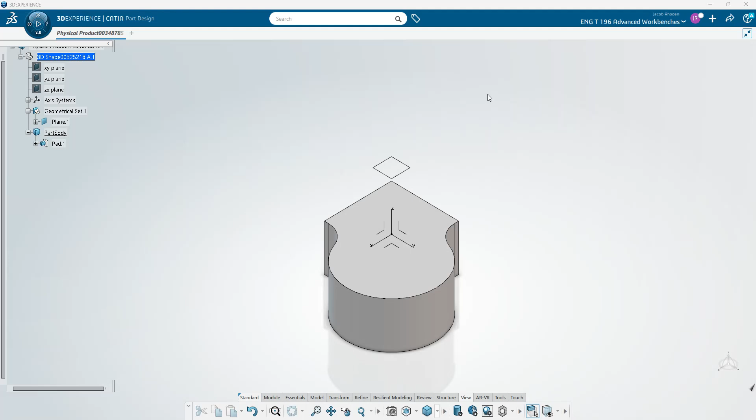Here I'm going to be going back over the steps real quick with a different shaped part, to show how the profile works, trying to cut this out and going over some different tool stuff.

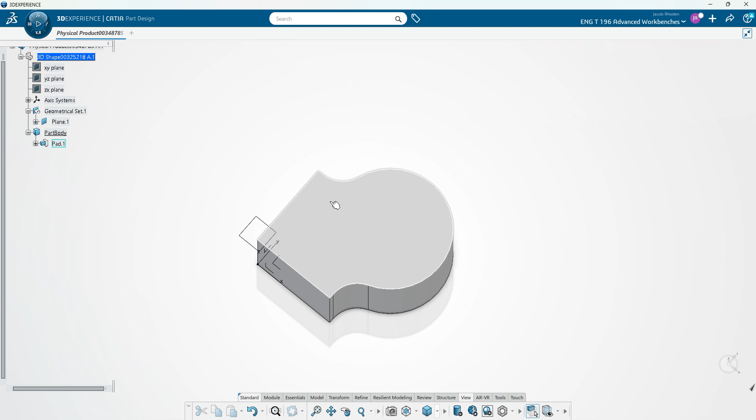So you can see I've made a strange looking part. I took a cube, implanted a circle into it, and then chamfered those corners in right here.

I'll show a quick example. Let me just make a new sketch, say I make a sketch right here. One thing you do have to keep in mind - if I just made the same rectangle and circle that I made...

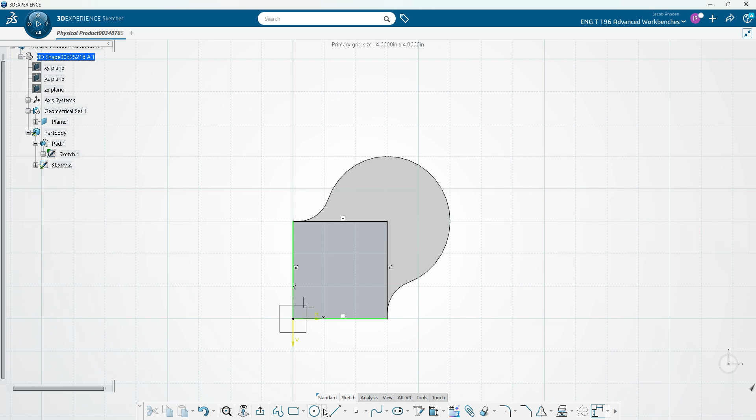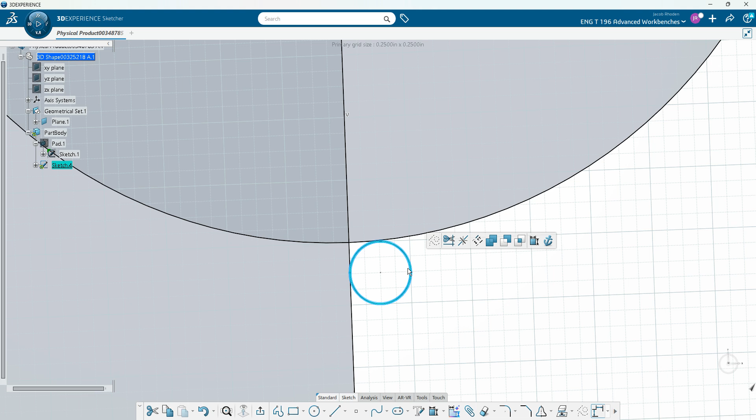Right here, you can see we would not be able to mill this without a lot of effort, because milling a hard corner like this when you're trying to use something circular, like an end mill - say we have our little end mill coming in, here we go, right here - the end mill is really going to struggle to cut that corner.

Which is why in our final part we chamfer that corner. So that's always something you want to think about, making some of these sharp little corners. To get that realistically, we'd probably have to pick the part up and rotate it over, and that's going to add more steps, more machining time, and eventually be more expensive.

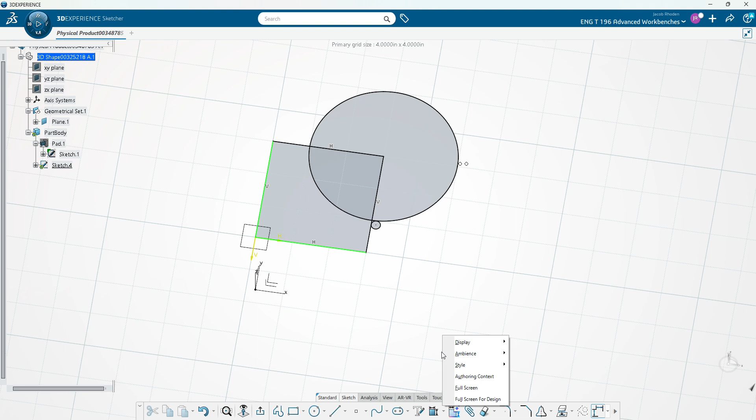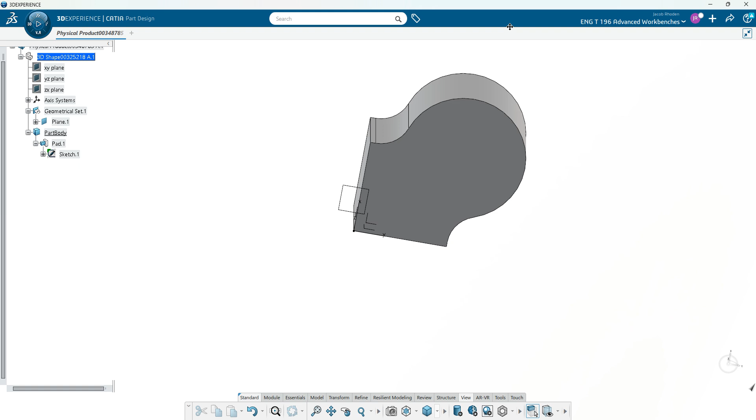So you always want to make sure that you're not making unnecessary features that are going to end up costing you more money. So if we exit out of this sketch, we can get out of our way and re-show that pad. You can see those corners - instead of having right angles that we'd have to take the part and probably pick it up in a fixture and move it, maybe put it in a fixture like this, and then we got this right corner right here.

Then we have to mill that little pocket out. Instead of doing that, we can just chamfer it and keep it so we can do all this profiling in one pass.

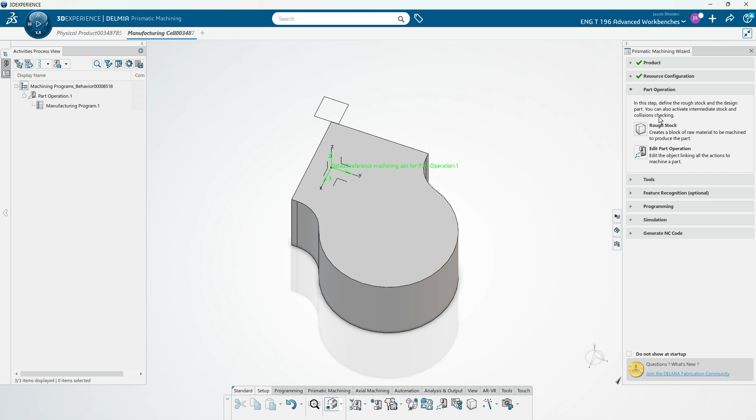So what we're going to do, same as last time: over here prismatic machining, already got our safety plane up, generic machine, okay, rough stock. Now here's us making the rough stock, so we want to make sure that we can see our part body.

So right in here you select 3D shape, select that part body. Yes, we do want to create a new one. Select that part body again. Then once again, we can see the stock.

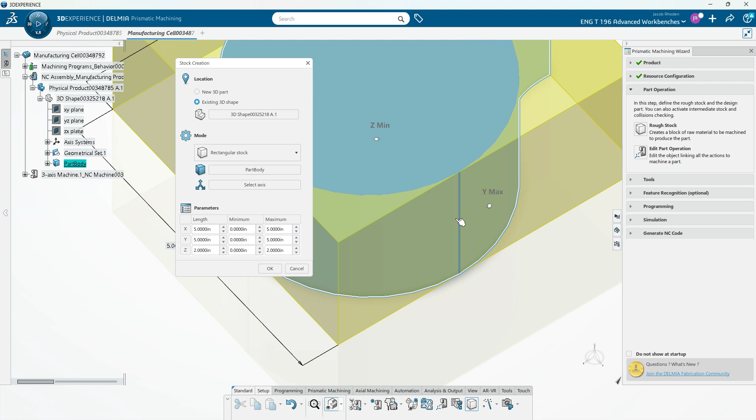So it obviously makes the stock as small as it can, but we don't want to have this little line right here, at least not right now - in case this could be like a casting or something, we want to make sure this line is getting cleaned up, because you don't want to have this nice big circle and then have one little strip that's for whatever reason not finished off nicely.

So what we can just do is take X, add an inch to it, take Y, add an inch to it, and boom - now everything is within that stock.

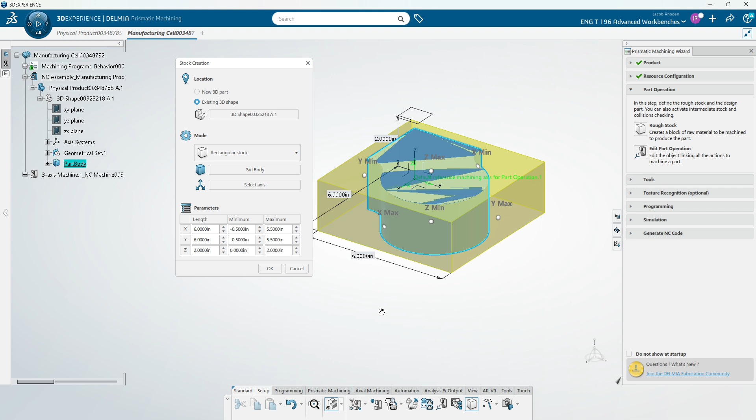And then obviously, like I said last time, if you're doing a facing pass on this, you can take this Z, move that Z up, and then you'd be able to put this in a vise, face it on the other side, and then you'd have a nice squared up part. But we'll just keep this to 2 since we're not facing it, and then press OK.

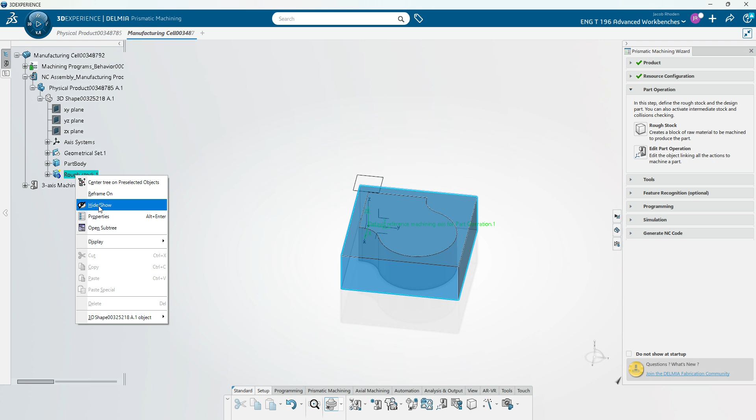Make sure we got our rough stock right here, then as usual make sure that we hide it so we can select everything, OK. Part operation, got our design part right here, then obviously escape or double click that.

Rough stock, go press on our rough stock, safety plane, and we'll keep it to aluminum. Maybe we can put it on roughing this time.

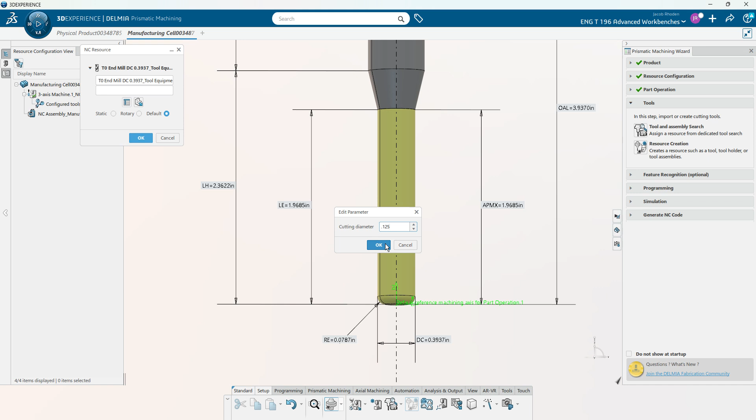So let's make ourselves another tool. Grab another end mill - since we're doing this outside, the diameter doesn't really matter, just like I said last time. Our part is about 2 inches in height, so we want to make sure we have more than 2 inches. Realistically you'd never want to use something like this if cutting 2 inches deep - you'd want at least half an inch, which is pretty standard in my experience. But just to see what it looks like, we'll throw in a little tiny 1/8 inch end mill.

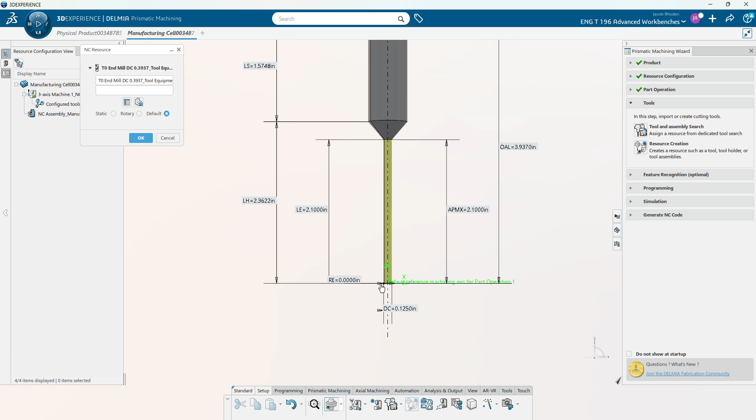And obviously we've got our heights right. I always take the radius off just because we don't need one down at the bottom. Press OK, and close out of that tool creation tab.

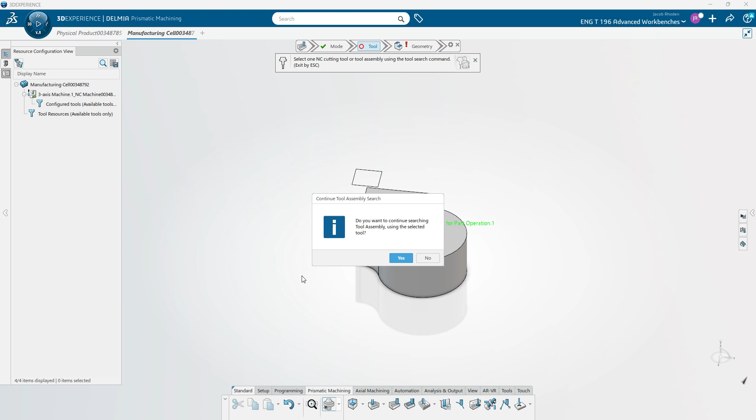Hide our manufacturing view. Not doing any feature recognition - go into our prismatic machining, into our profile contouring, make sure we're doing between two planes like we want to, go find our tool and select it. Don't want to keep searching because we already found it. Select that bottom plane, and we're not going to choose any optional stuff this time. Now we've got our tool and our strategy - we're not going to be changing anything.

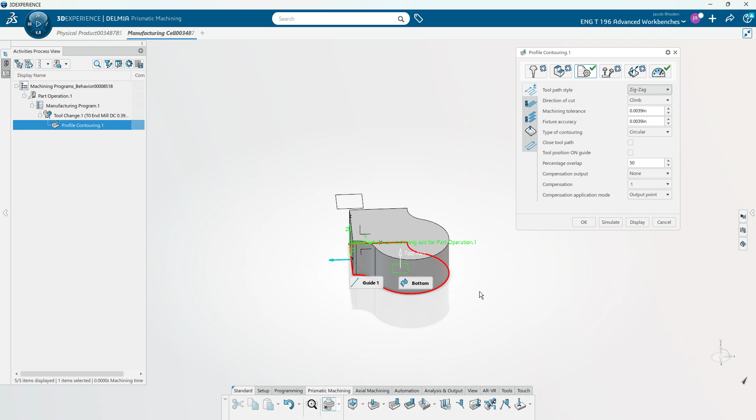Depending on your material, some of this stuff - the material, finish, tooling - can all change things. So maybe if you were cutting cast iron, you could do conventional because of the way it cuts just that top layer and brings the chips out a bit. It can be very good for cast iron because it's got that hardened surface. And obviously you're doing your finishing passes and different sequences, but since we're just using a 3-axis mill, we don't need to worry about any of that.

Then we'll throw in, once again, all of our macros - so retract, select that safety plane, clearance already to the safety plane which we selected previously. Add these puppies in.

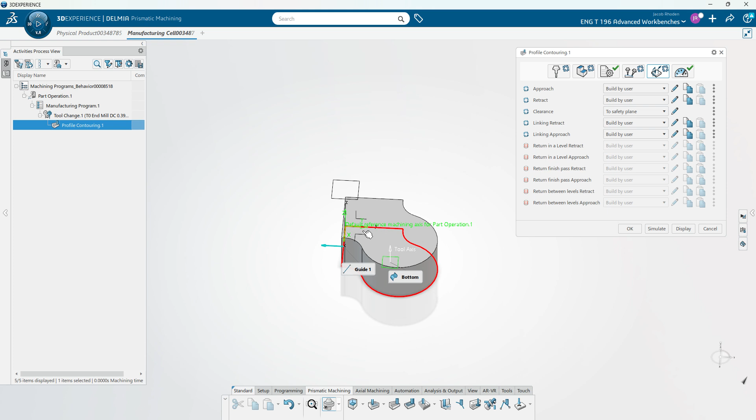I'm not going to use any of these fancy ones because this is nothing fancy. We've got our speeds and feeds up in here, which should be different from the last one - I've yet to actually go back and look, but these should be different now that we're doing roughing and not finishing. Then we'll simulate, and we can see our tiny little end mill come down.

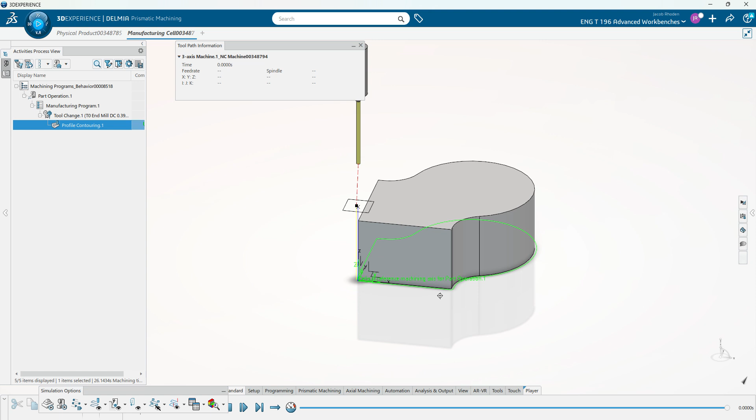I'm like 99% sure this thing would snap the second it went to go drill through this. And then we can go in and look at our material, as if it was really cutting into the stock.

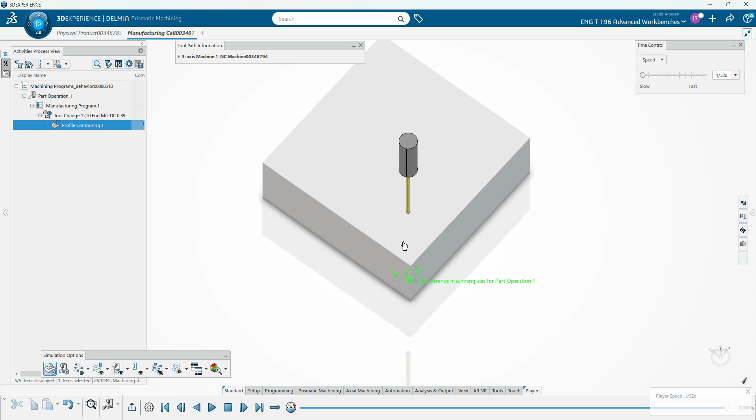Another thing is, depending on the part you're doing, you might not want to be plunging the end mill straight down into the stock and then cutting it. You might want to have that part moved over to this corner, so maybe you're just dropping down outside of the stock and finishing up these corners and then cutting in, instead of plunging the end mill right down like a drill and coming all inside - because you can lighten your cutting load if you're just doing the sides, since you're not cutting straight into everything. But we can see it goes through, makes those tiny little cuts and cleans out the whole part, and then you can pluck it.

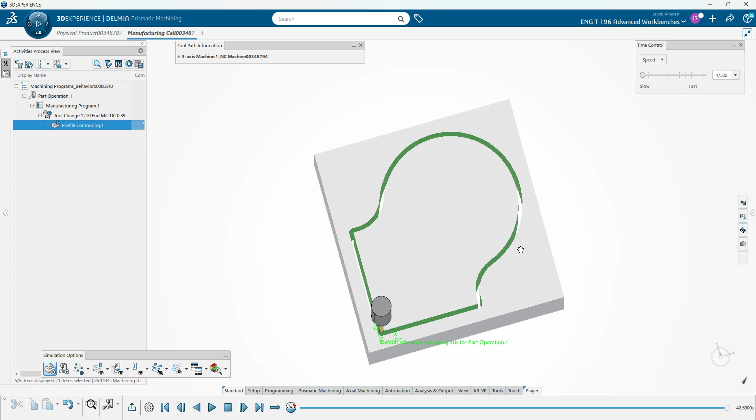Another thing with this is we don't need stock this big for this part. You can see all this is getting wasted - well, not wasted, but you don't need it. Sometimes before you machine stuff, somebody will bandsaw this off, but ideally, when you're getting the stock, you just don't even need to have that there.

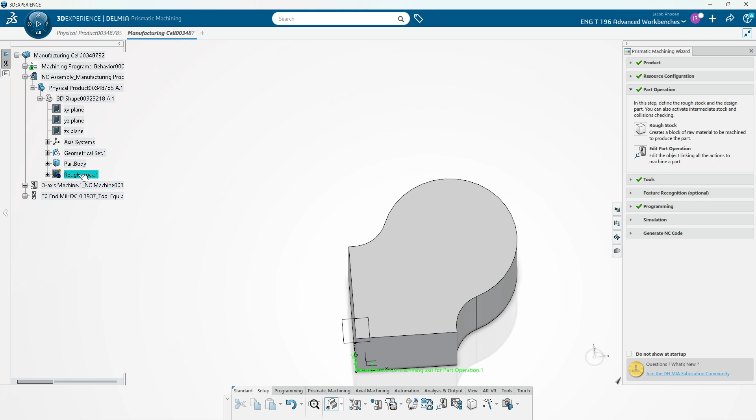What we can maybe do - let me see - is we can exit this simulation. Let's press OK, and go to our part operation. Let's see, can we change the way that this rough stock is? So if we delete this rough stock, and then, now we're in part design - here's us back into prismatic machining.

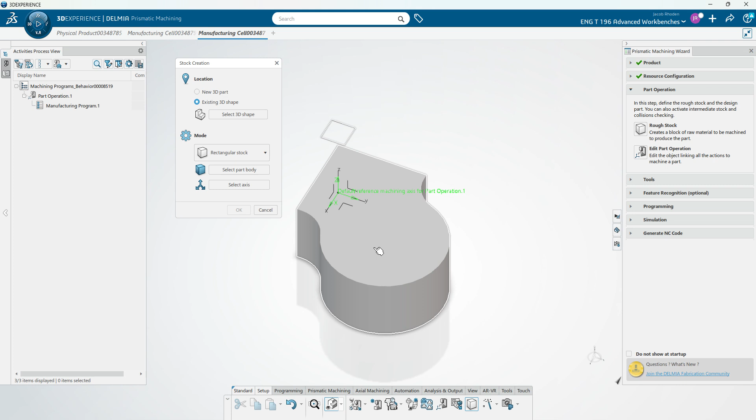So let's just do a quick little question of can we, so take our rough stock, select 3D shape, yep.

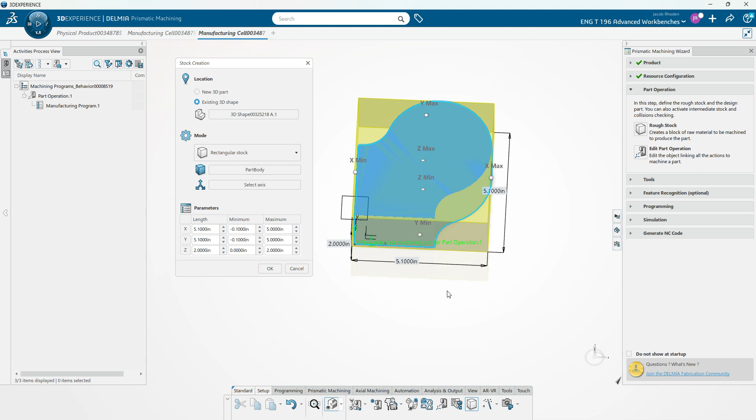You can see here, realistically, we can take this just a little bit. So maybe if we can take that X, so X minimum, maybe we can do X minimum, minus 0.1, and now just bring that out a little bit. Same with Y minimum, right here, minus 0.1. And then Y max, we'll bring Y max out to, what is that, 5.1?

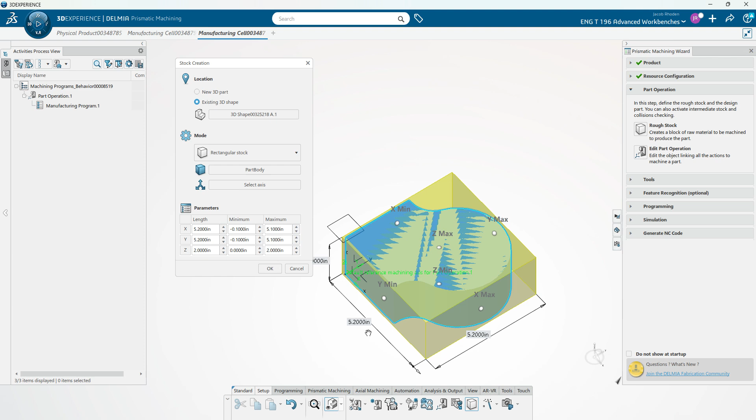And we'll do Y max 5.1. And we can see now this is fully within, the part is fully contained within the stock, obviously other than the top and bottom faces. And now we're using a lot less, because we used to have a full inch off these. So now we're saving weight, we're saving money, we're not scrapping all that stuff.

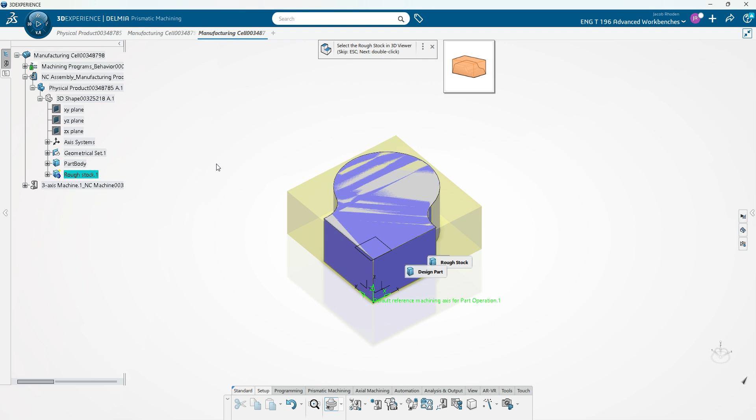So then we just hide this, and then part operation, grab our little info in here, grab our design part, grab our rough stock over here, make sure we hide that.

I'll reselect the design part to make sure I didn't accidentally select the rough stock. And see, that's why I always say, make sure you hide that rough stock, because you probably just saw me do it. I selected the rough stock on accident because it wasn't hidden. But now when I select that part body, it'll be selecting the right thing.

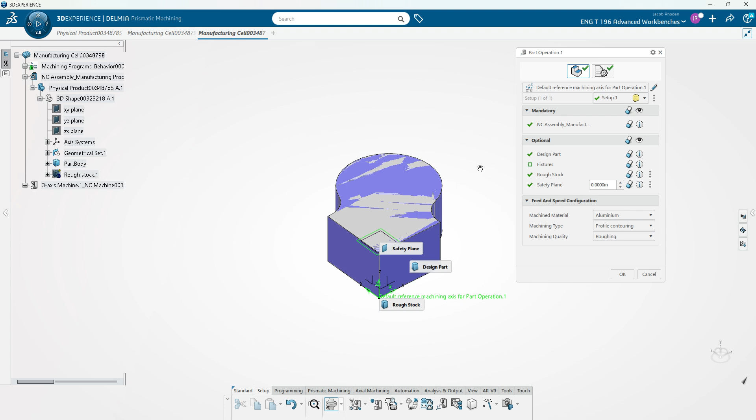Select our safety plane right there, which we can see is above the part. And now we can just make our tool, and then we'll just real quick, 2.1, 0.5, 0. So that's good. Okay.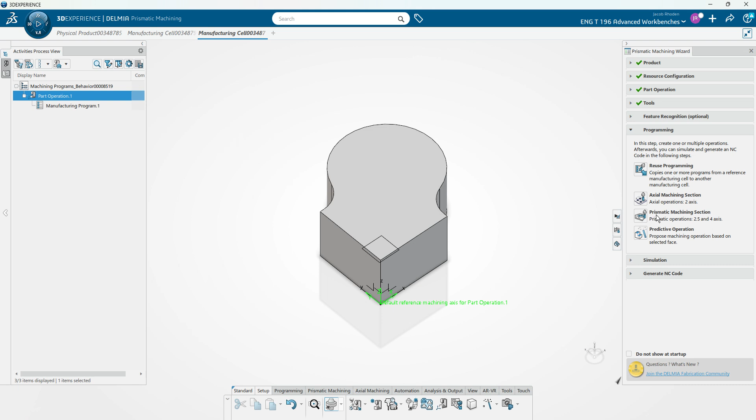Go away resource configuration. Go away manufacturing view, programming, prismatic. And we can also just select it right down here. Profile contouring, between two planes. Select our tool. Boom. No. Bottom plane. Not going to select anything optional.

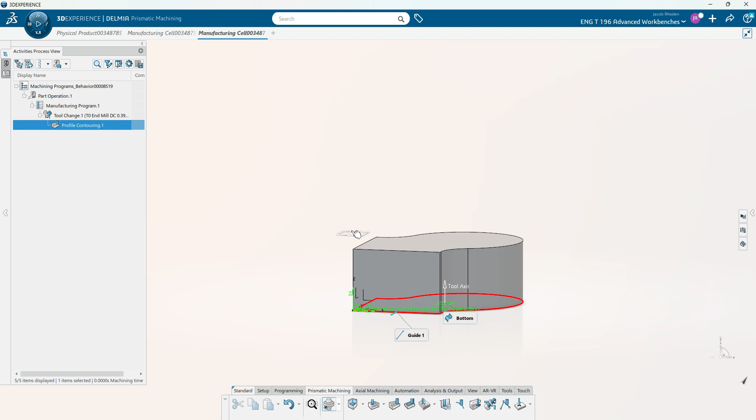Jump to our macros. And I'll go away. You can see that safety plane. Obviously, once you start getting more advanced with doing this kind of CAM software stuff in CATIA, you can just load in your macros instead of having to sit here and select them every time, which obviously would save you a lot of time. But we have not gotten to that part yet.

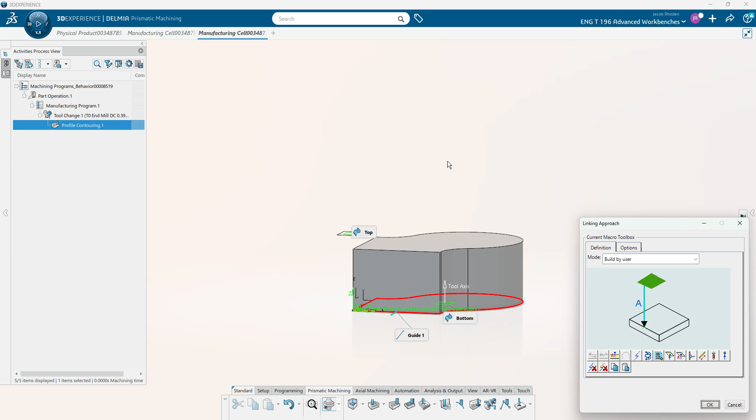So we got our macros, speeds and feeds are here. Strategy, we're not changing any of this stuff, and then we'll hit simulate. And now we can see, obviously it's doing the same thing, just going around and everything.

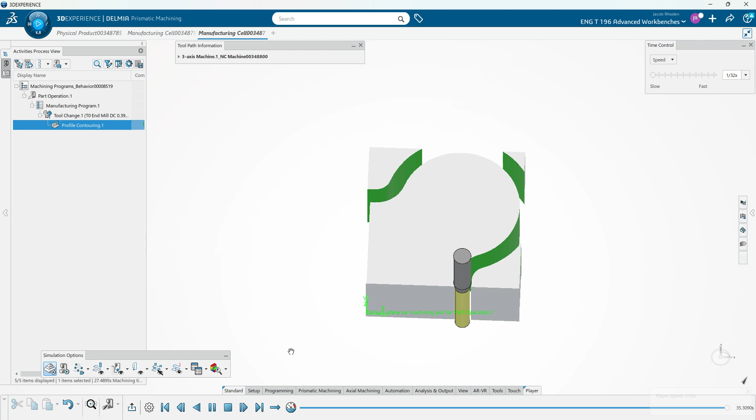But if we pop into that, we can see our stock. Bring this speed down. And we can see, look at that, look at how much less we're wasting now. Just from, obviously we're using a bigger end mill, but still, we only got 3 little parts.

And you could just bandsaw right here, bandsaw right here, bandsaw right here, and then just go, maybe you have a little small part that you could use this for, or you can go send it back to recycling.

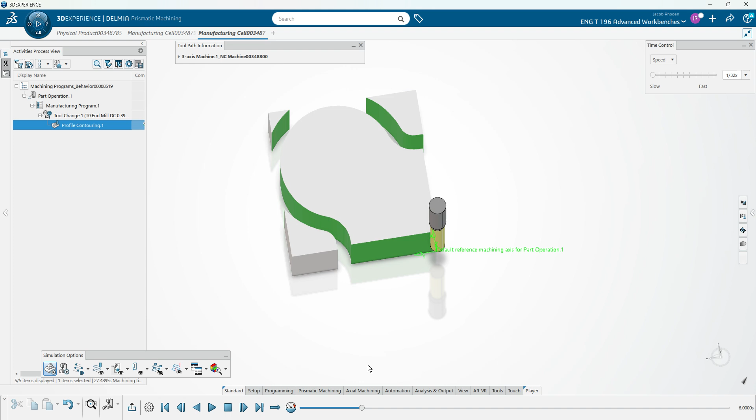And we're not having to, if I select it right here, you can see, we're not having to plunge down into a bunch of material, which will really wear on your end mill. Ideally you plunge down off the side and then cut into it, but we're just coming down right onto that side of the part without having to wear our end mill down a bunch extra, maybe even risk breaking it.

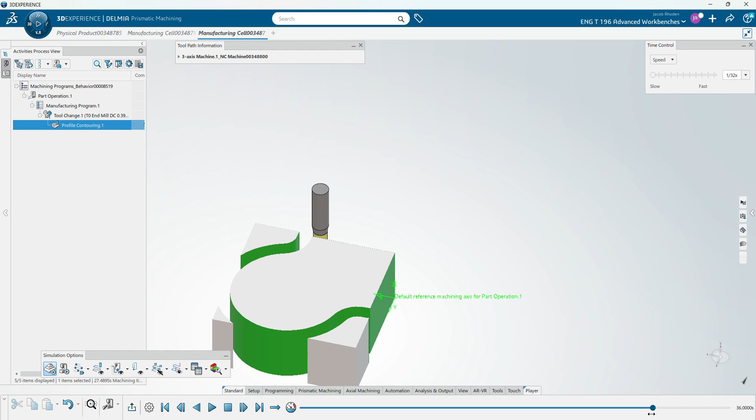And then we can just go around, barely cutting any material right here, just clean it up. Go around through there. And same with the cleanup on this side, because there's only that 100 thou on this side of material that we're just cleaning up, keeping the chip and end mill load down.

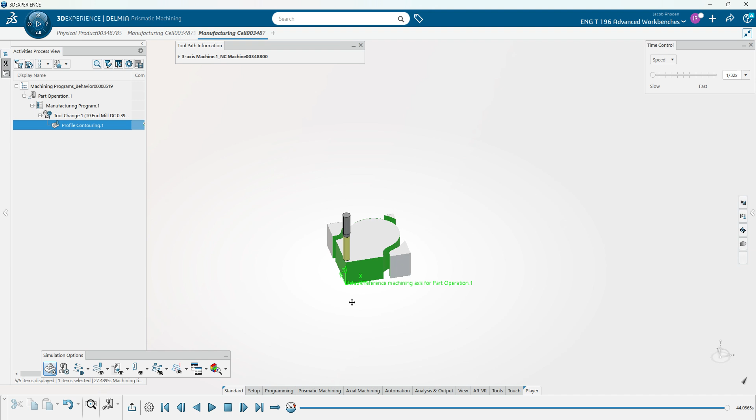Yeah, and that's just a couple of tips how to change your stock size and everything in prismatic machining for CATIA, not V5, excuse me, CATIA 3DExperience. I hope you learned a little bit more, as always, and thank you for watching. Have a great day.